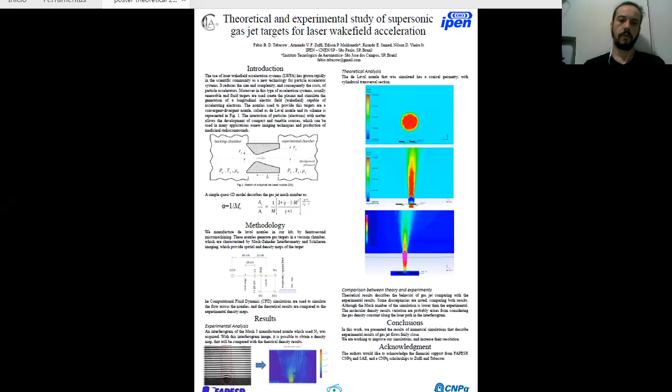Hello, my name is Fabio Tabacow, and I will present my work titled Theoretical and Experimental Study of Supersonic Gas Jet Targets for Laser Wakefield Acceleration.

So first of all, I'll make a previous introduction for this work.

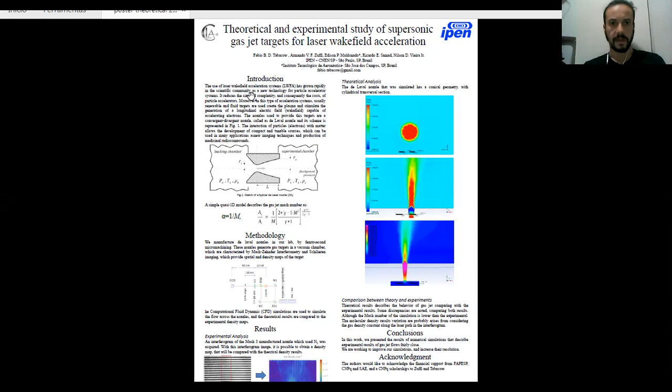The use of the laser wakefield acceleration system has grown rapidly in the scientific community as a new technology for particle accelerator system, and it reduces the size and complexity and consequently the cost of particle accelerators.

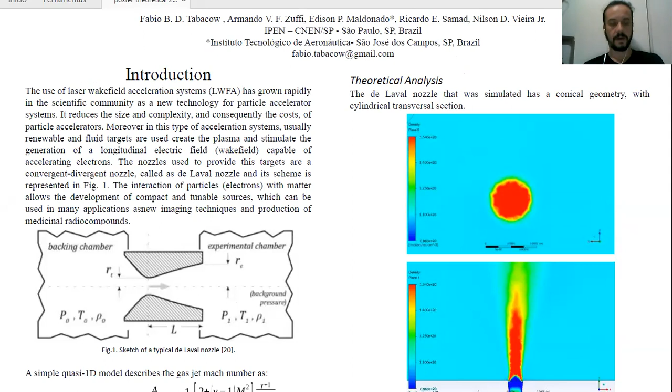Moreover, in this type of acceleration systems, usually renewable and fluid targets are used, created the plasma, and stimulated the generation of a longitudinal electrical wake field capable of accelerating electrons. The nozzle that can accelerate the gas jet in a supersonic flow are the Laval nozzles.

That is this kind of nozzle here represented. They are convergent, divergent nozzles, and it's shown that.

Because of this, we are working to implement a laser wakefield acceleration in our laboratory, which demands the use of this kind of gas jet laser targets to accelerate electrons.

Here in this figure, we represented the Laval nozzles, and this side of this figure are the pressure, temperature, and density of our gas system, and at this side the same properties here, but for the chamber, the vacuum chamber, the experimental chamber. Here's the throat radius, and here's the exit radius of the Laval nozzle.

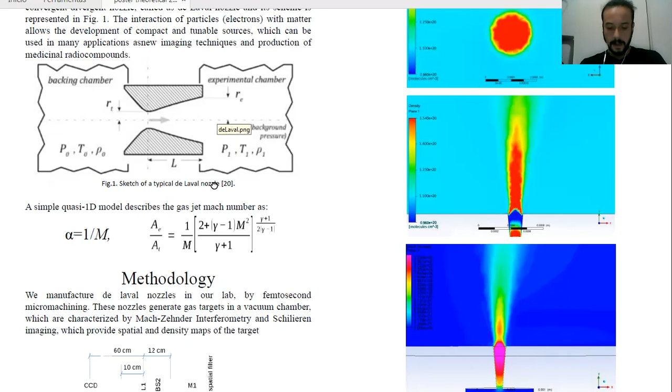This is a homemade nozzle built in our laboratory, and it will be compared to a theoretical analysis made with computational fluid dynamics with a finite element method. The software used for the simulation is named ANSYS, version 19 academic.

So a simple quasi one-dimensional model can estimate the gas jet Mach number based on the ratio of the exit and throat areas, represented here in this equation. So this is the Mach number, and here is only this property of the gas used.

This model disregards the exact value of the background pressure in which the jet expands, the presence of shock waves, and the nozzle length and length of the convergent region. To better understand this, design model and the numerical simulation used by us in this work.

So now I will talk about our methodology used here in this work. For the experimental results,

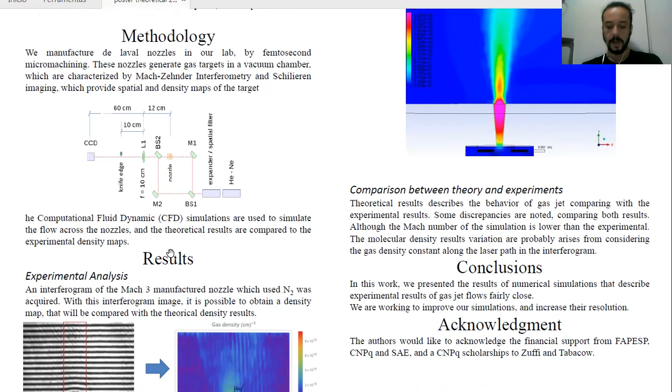In this work, we simulated an etched nozzle in a 600 micron thick aluminum plate by an ultra short pulse machining system in our lab.

The diameter of this nozzle: for the exit, 190 micrometers, and 86 micrometers for the throat.

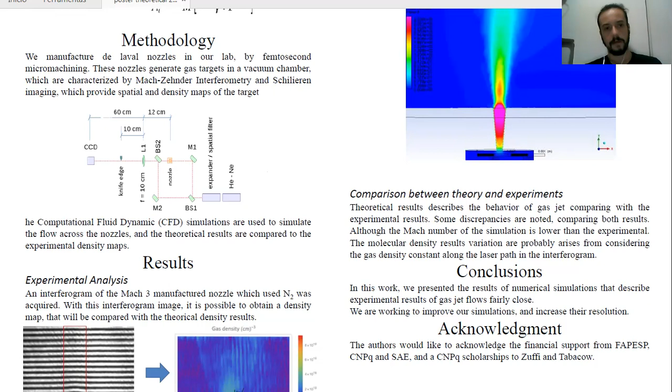It defines a Mach number about 3 for nitrogen gas according to this quasi-1D model.

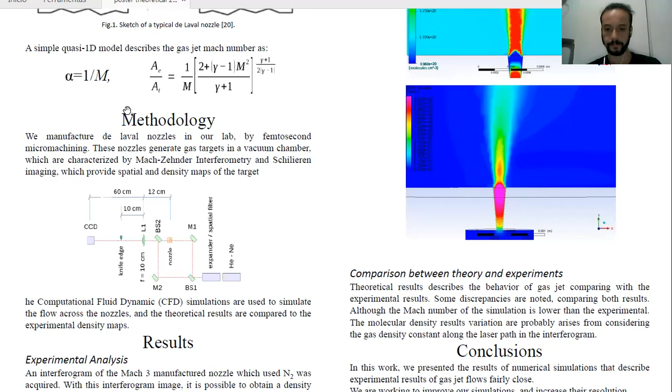More details of this manufacture of the nozzle can be seen in the work of Bruno Kiameto, titled Development of the Etched de Laval Nozzles for Laser Electron Acceleration by Ultra Short Pulse Micro Machine, that will be presented in these conferences.

The fluid used here in this simulation, for the results, is an ideal nitrogen in a CFX model of phases, and the gas flow is described by the Navier-Stokes differential equations.

These equations are solved using an upwind scheme discretization method, and the turbulence is modeled by the K epsilon method. The backing pressure and the background pressure are the same as the experimental, and the background pressure is determined with an exhaust pressure like the background pressure of our experimental setup.

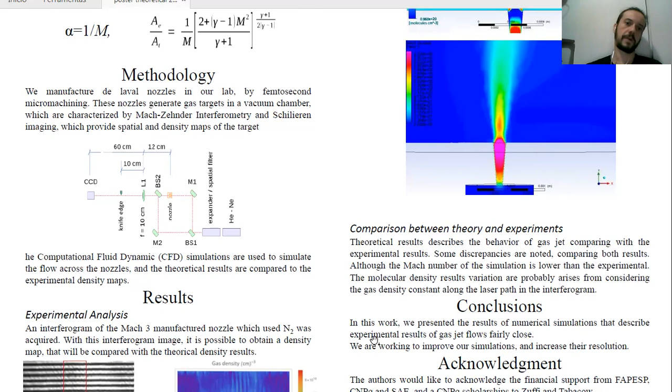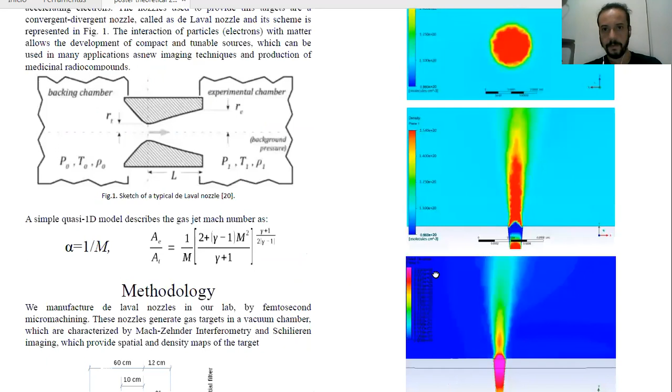So in the results section, we divided it into experimental analysis and theoretical analysis, and a comparison between them.

In experimental analysis, this figure presents the interferogram images acquired by the CCD, and this shows the density map derived from the interferogram after applying a mathematical method to these images.

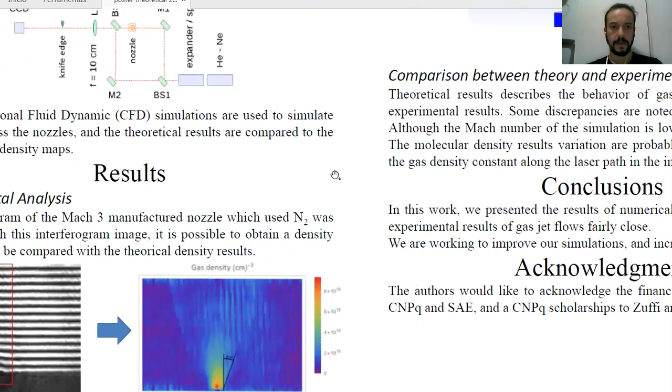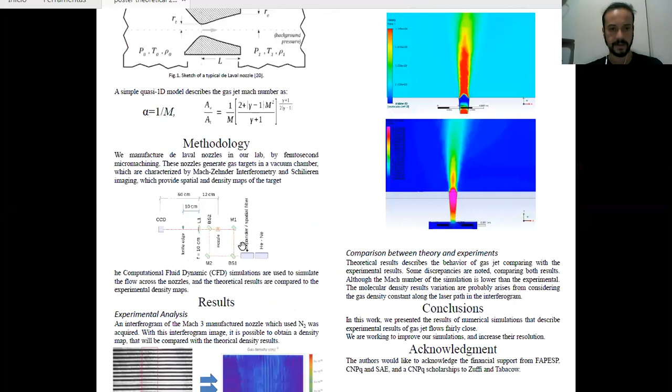From this density map, we can measure the divergence angle of the gas jet, and it's about 20 degrees, as we can see here. According to this quasi-1D model, the Mach number estimated is about 2.8.

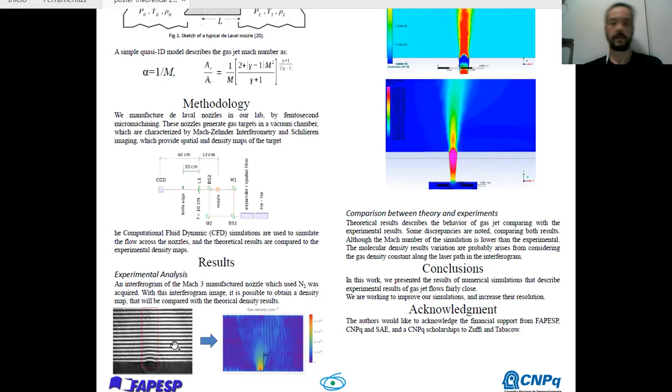The work presented by Armando Zuffi, titled 'Development of a Modified Mach-Zehnder Interferometer for Time and Space Density Measurement for Laser Wakefield Acceleration,' makes it possible to verify in more detail the process to acquire the density map from this interferometer. About the theoretical analysis here,

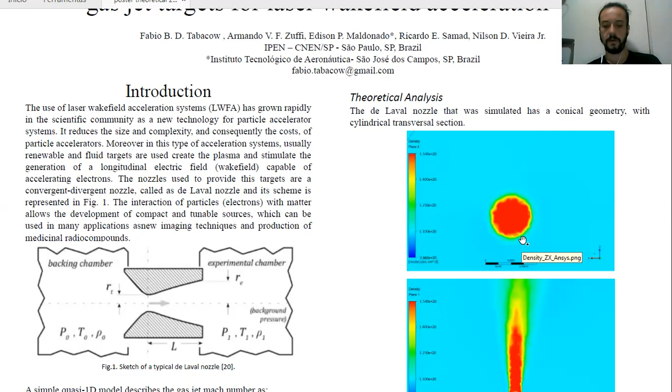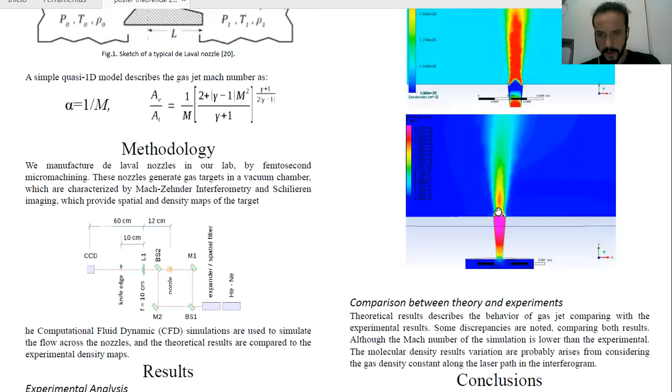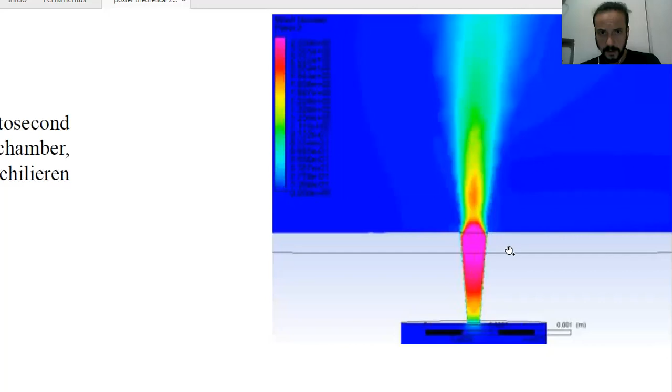We can also see that it's about 2.5. So the discrepancy between this value and the experimental results comes from the simplified 1D model, which disregards some real factors, for example, the length and shape of the nozzle.

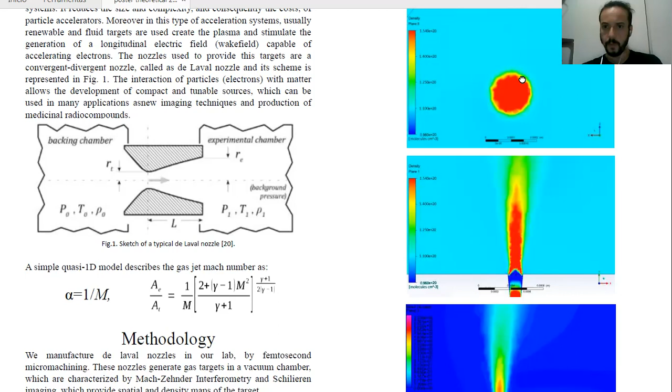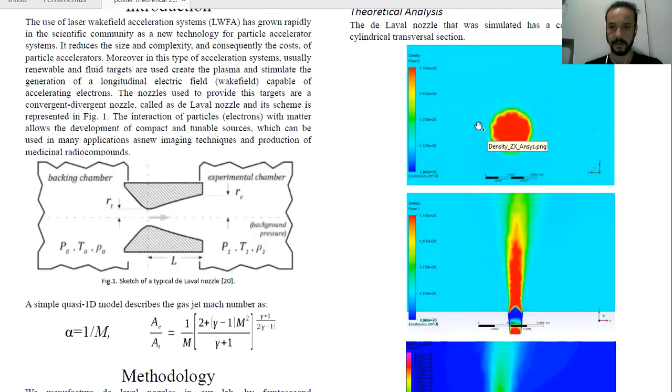This figure shows the molecular density distribution of the gas in the gas jet in orthogonal planes. In this one, we can see an abrupt change, which is desired for laser wakefield acceleration.

In this other figure, we can see that the jet has a circular cross section. The density decreases along the jet growth, and the minimum value is reached at the exit, then it increases.

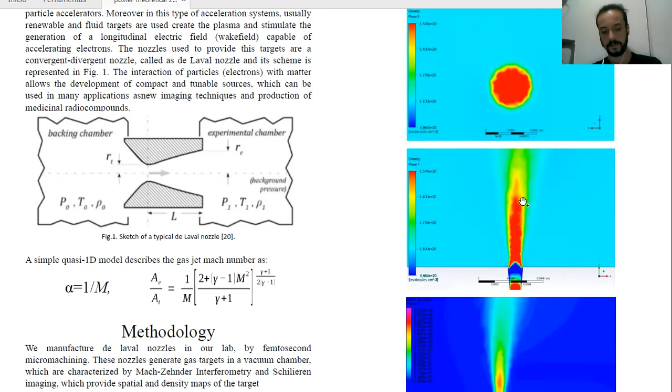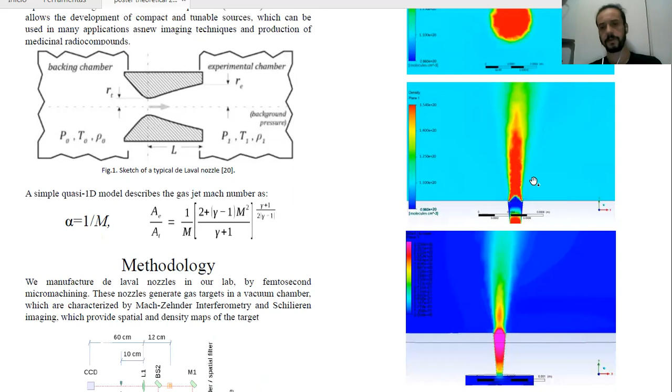Some inhomogeneities in this figure are simulation artifacts based on a non-ideal discretization of the space, due to an academic license that has a limitation on the maximum number of nodes and elements in the grid. These characteristics result in a simulation that does not describe exactly the physical system.

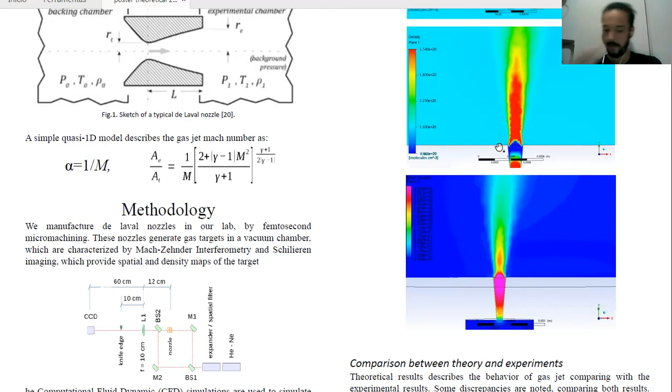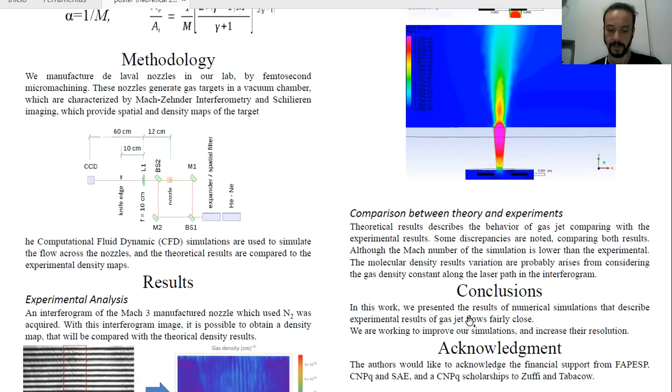When you have a limited number of elements, the simulation volume needs to be small but kept large enough to minimize wall interference. The number of elements influences the spatial resolution because it affects the size of the elements.

Another factor responsible for these discrepancies is the background residual pressure, due to an exhaustion system modeled to extract the gas from the vacuum chamber. This residual pressure limits the expansion of the gas.

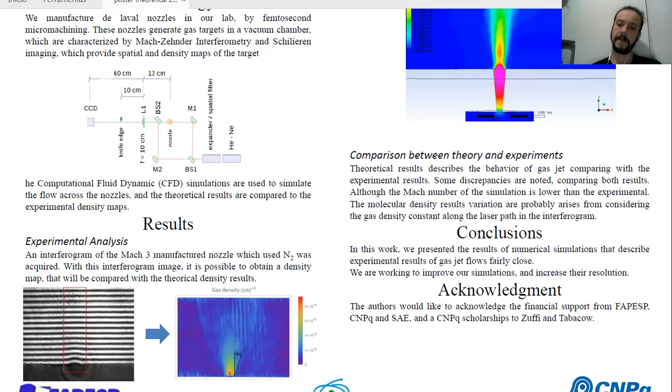So comparing the experimental and theoretical results, it's possible to verify here, comparing both figures, that the jet behavior is closely similar. So mostly the Mach number and density are close.

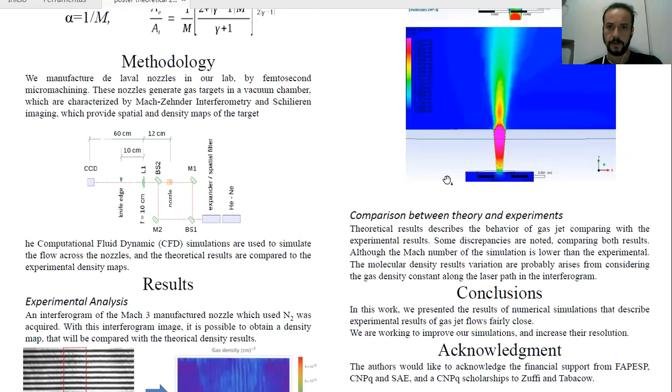For the nozzle exit, about 100 micrometers away, although the experimental jet is more divergent than the theoretical prediction. The Mach number difference is due to the models used, so here we simulated, and we used these models.

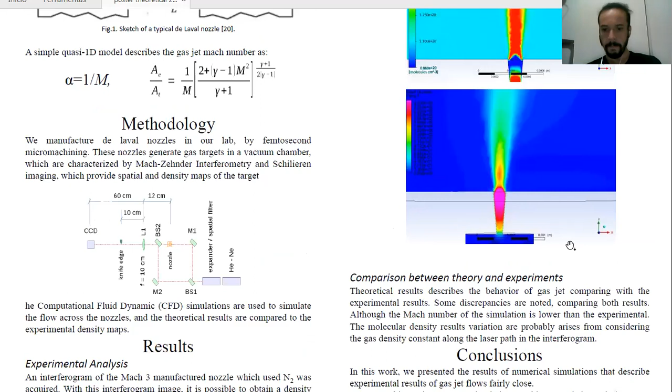So we concluded in this work that the simulation model describes the experimental results of the jet flows fairly closely, but more studies need to be done to get more realistic predictions and design better nozzles and gas targets.